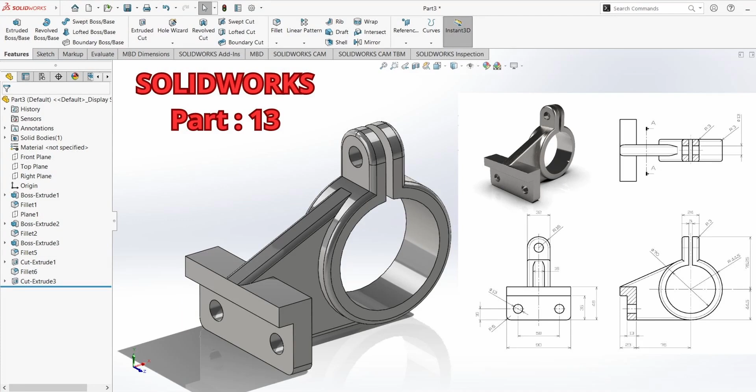In today's video we're gonna draw this 3D part. So let's go straight to it.

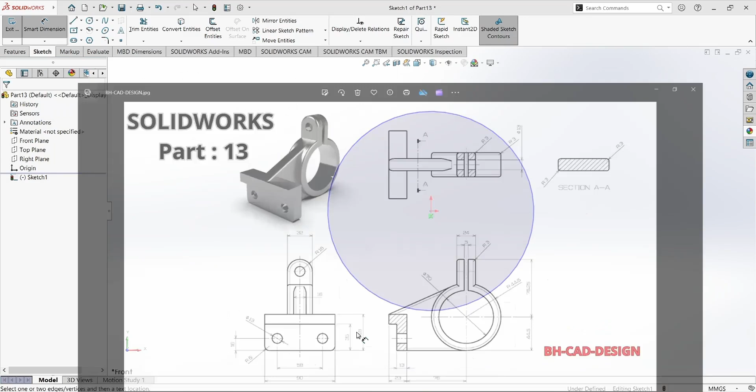First we hit sketch, then front plane and circle. Now we'll define the dimension of the circle, which is 70 in the interior. Then we'll draw a center line.

Draw these two lines and make them symmetric. The distance between these two lines, if we start from the interior, is 5.

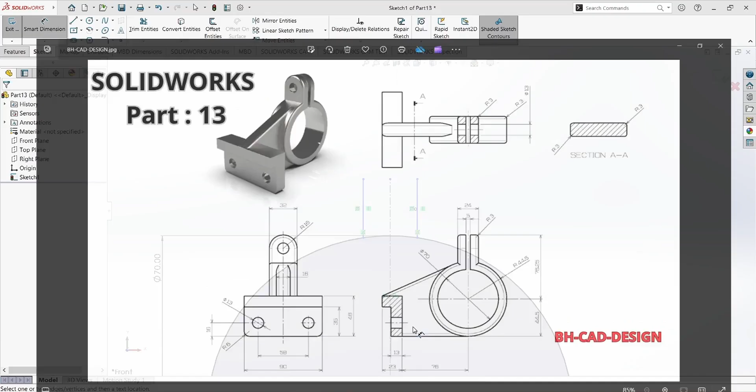Now the distance between this point and the center of the circle is 76.25. Make this point and this point horizontal.

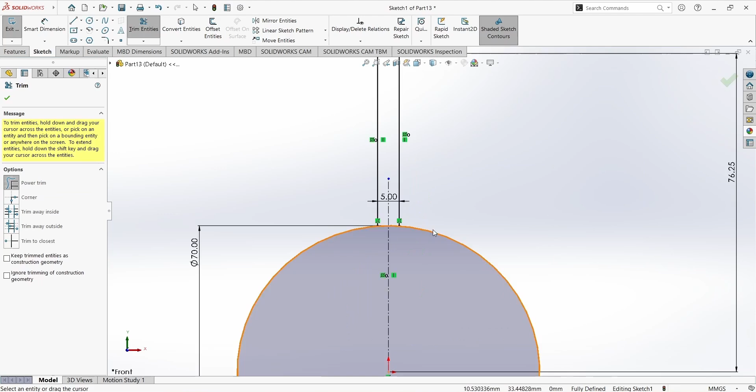Now we'll trim the interior. Select all the sketch, offset entities. Don't forget to remove the center line.

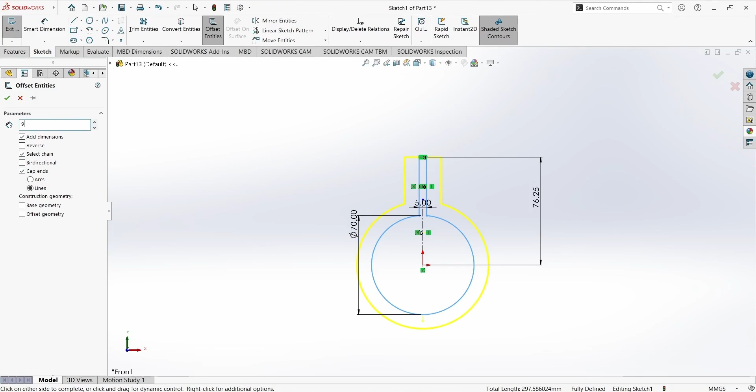The thickness is 24 minus 5, which is 19. 19 divided by 2 is 9.5. Don't forget to hit cap ends and lines.

Extrude the boss. We have the depth 32.

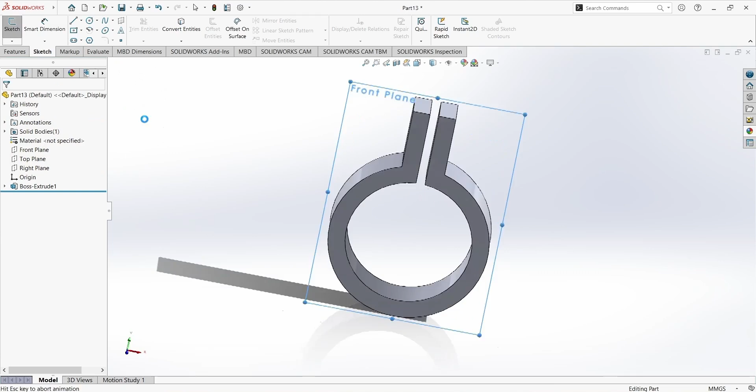Now hit sketch again, front plane, yes. We'll draw this sketch. Now we'll define dimensions. We have 23 and 76.

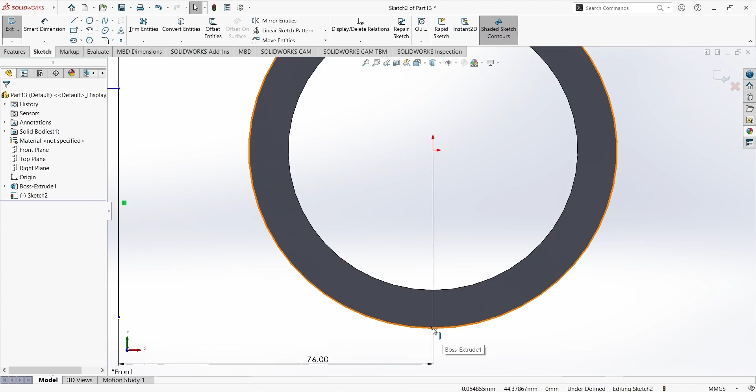23 and 76. Okay, we'll make this point and this point horizontal. We still have to define this dimension, which is 48.

Now we'll select these two lines, offset entities. We have thickness of 13.

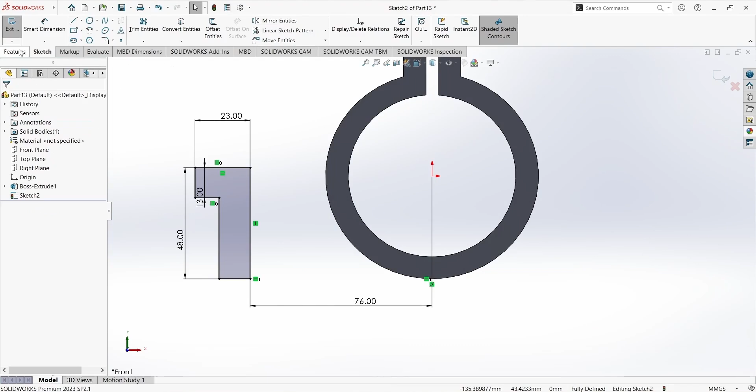Features, extrude the boss. Yes, mid-plane. We have 90 millimeter. Okay, we hit sketch again now.

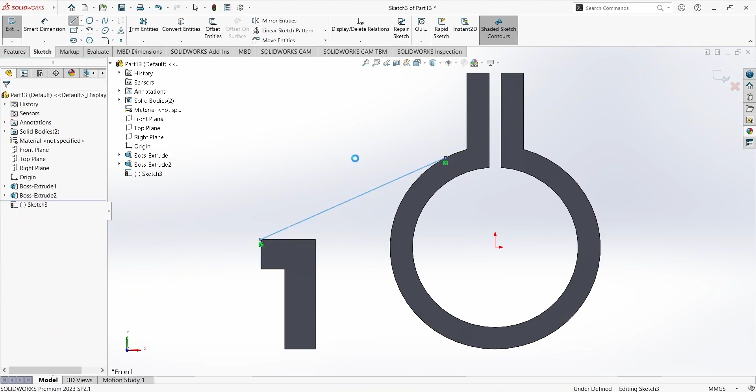Front plane also. Make a line from this point to here. And we make this line with the circle tangent.

We'll convert the circle in these two lines. And draw a line from this point to this point. Then we will trim entities.

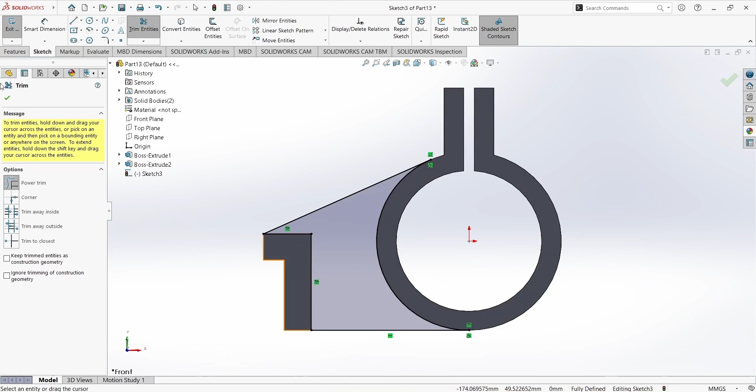That feature, extrude the boss. Mid-plane, yes. We have thickness of 16 millimeter.

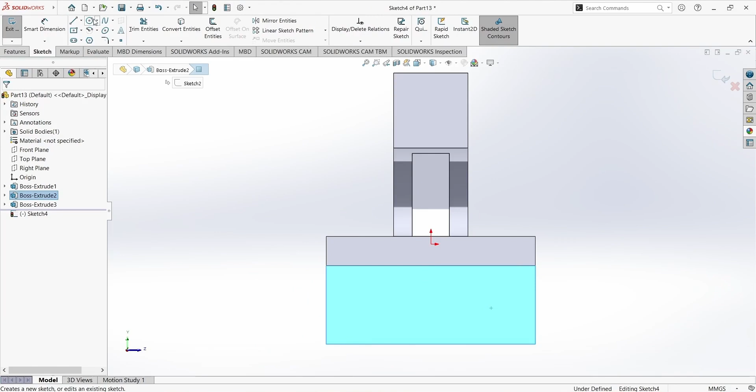Then we have these holes. We hit the surface sketch. We draw a center line first.

Let's define the circle. We have 13 diameter and 16. 13 and 16 here. And the distance between these two circles is 58.

Now we will mirror it. Then extrude cut through all. We still have the circle.

So first we will make this fillet 16. Let's make it manually, it's better. 16, yes. Then we hit the surface.

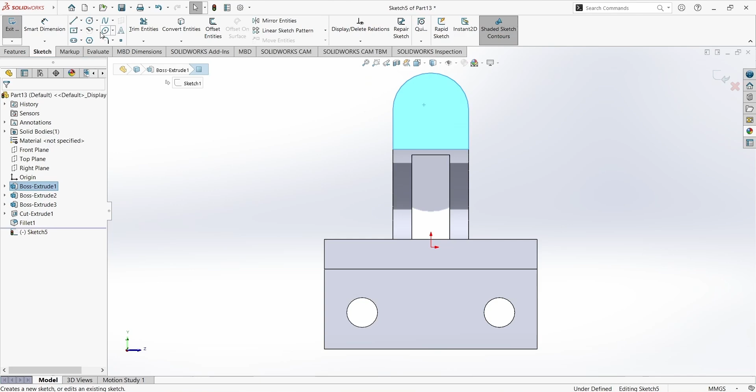Circle, yes, to get the center. Then we'll define the circle. Diameter of 13. Extrude cut.

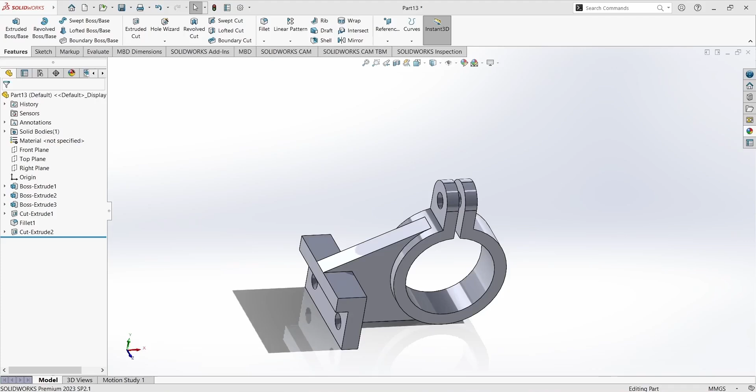Through all. Now we only have fillet to draw. We have 6 millimeter here.

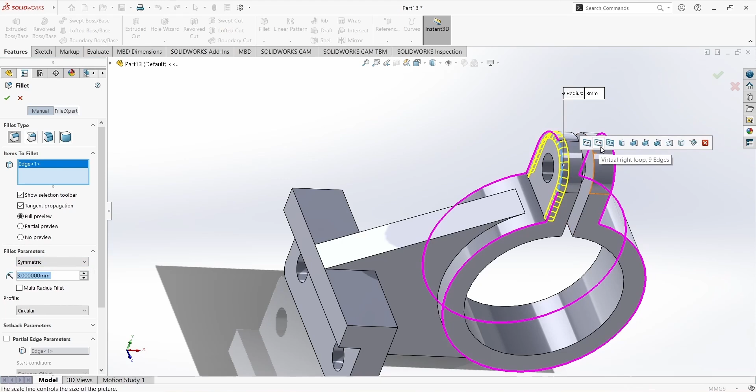We have 3 millimeter radius. All right, that's it.

Choose this one and select right loop. All right, I think it's all done.